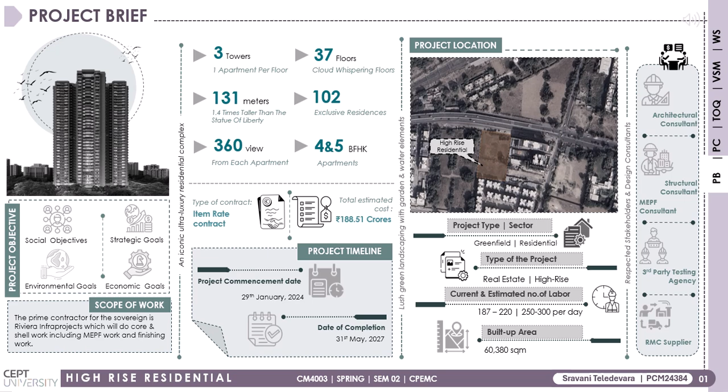Coming to the pre-construction activities, we have the pre-construction meeting, safety control measures, execution sequence, site mobilization plan, staff requirement, equipment and tools approval, legal, time, and cost. Coming to the site mobilization sequence, we have the mobilization planning, next the site survey and preparation, setting up the office and the labor colony, then setting up the material storage area, and then the equipment mobilization.

For the pre-construction meeting, we have stakeholders like architects, site engineers, contractors, subcontractors, and clients. In the pre-construction activities, we plan for the requirement of water and electricity on site and the labor colony. The main water sources are the borewell and the water storage tank. The basic machinery for electricity consumption was mainly the tower crane, bar bending machine, bar cutting machine, bar threading machine, borewell motor, and others from the non-tower areas.

Apart from this, the staff on site are the project manager, HR, quality department, that is the quality head and the engineer, the planning and billing department and the store department. We have around 220 laborers. Next under pre-construction activities, we have the legal approvals, that is, the responsibilities of the client and contractor.

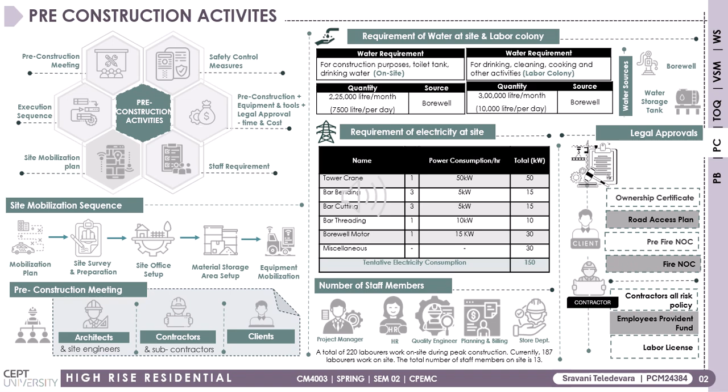Further continuation of the pre-construction activities mainly focuses on the safety control measures and equipment mobilization on site. Proper safety protocols are essential, especially for high-rise construction. Toolbox talks, PPE kits, soft and hard barricades, and safety boards were mandatory measures implemented on site. It also lists the major equipment like tower cranes and bar bending machines necessary for vertical construction. This reinforces that pre-construction safety planning is not just a compliance task but a foundation for effective execution throughout the project lifecycle.

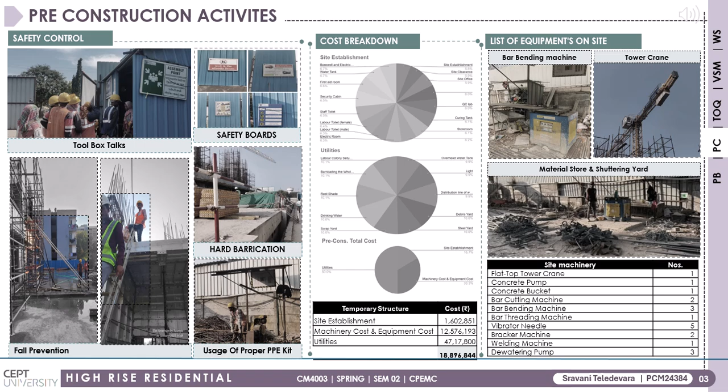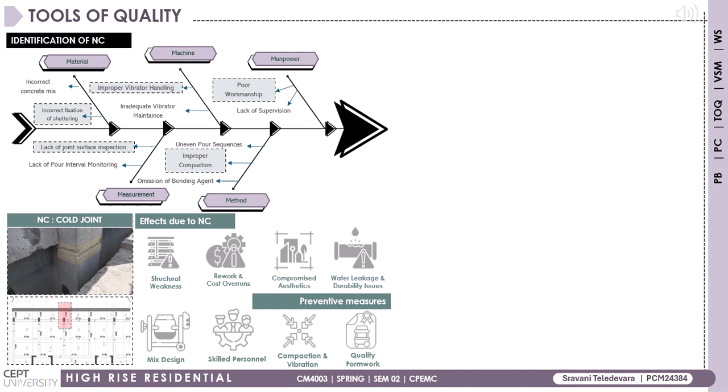Here we shift attention towards identifying and mitigating non-conformances during construction. Using histograms and Ishikawa fishbone diagrams, we explored the root causes of quality lapses, ranging from poor mix design and compaction techniques to lack of skilled labor.

The consequences of NCs such as water leakage, compromised aesthetics and cost overruns make early detection critical. Preventive measures like better formwork practices, skilled supervision, and standardized vibration techniques were suggested to ensure consistency.

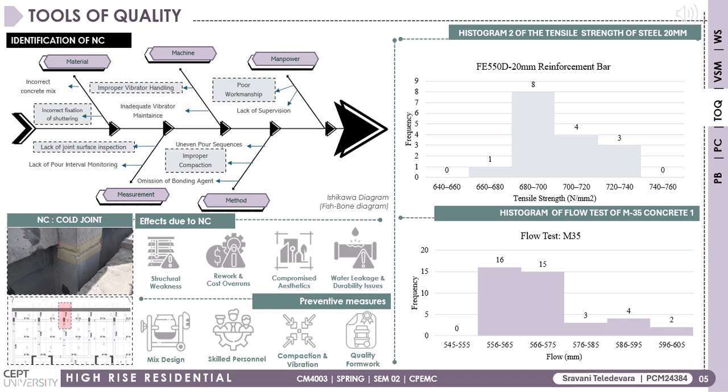Coming to value stream mapping, it is one of the most insightful tools applied for lean construction. Here, the current state of shuttering work for the shear walls was analyzed with a cycle time of 10.89 minutes per square meter, while the calculated target time was 6.75 minutes. It was clear that inefficiencies existed, so we mitigated the non-value Muda 1 and Muda 2.

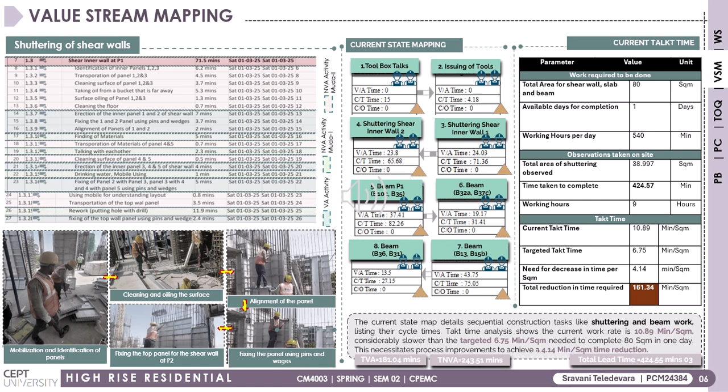The current state map also revealed a total lead time of 424.55 minutes, out of which only 181 minutes added real value. This mapping made it easier to pinpoint delays and understand where lean strategies could make the most impact.

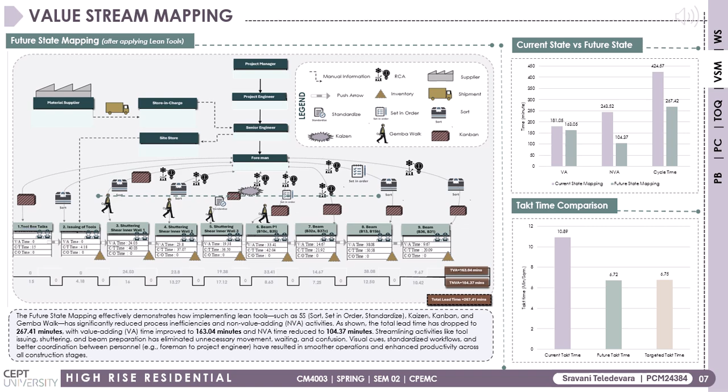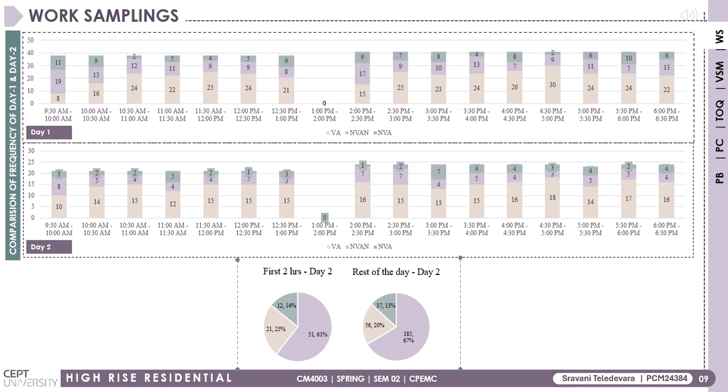Continuing the work sampling analysis, comparing time distribution on day 1 and day 2, interestingly, day 2 saw better concentration on core activities, with 67% of time spent on a single task compared to 59% on day 1. The drop in secondary task time suggests improved planning and flow.

Such comparative analysis not only helps understand daily performance trends but also aids in short term scheduling and micro level workforce management.

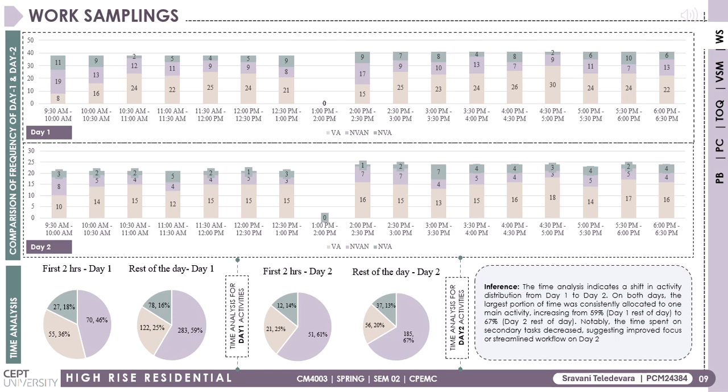Coming to my key learnings, the portfolio highlights the importance of integrating lean tools and quality management practices in high-rise residential projects, from pre-construction activities, mobilization and quality checks to lean mapping and work sampling. Each layer of analysis helped reveal insights into efficiency, coordination, and control.

Personally, the studio helped me develop a systems thinking approach to construction management. I learned that every delay, every rework, and every miscommunication on site is not just a task level error but a systematic inefficiency that can be addressed through structured tools.

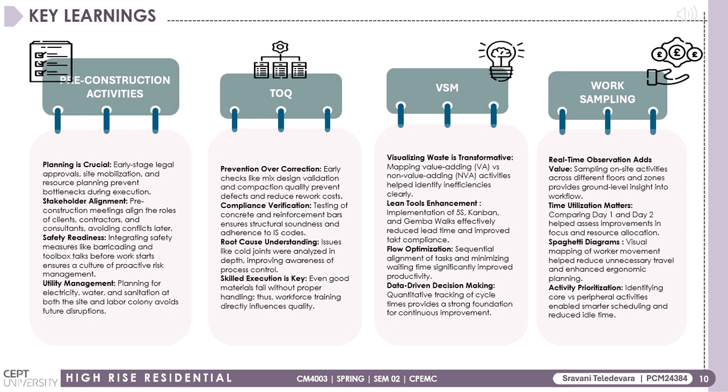I look forward to applying these learnings in real world projects, making construction not just faster and safer but smarter and more value driven. Thank you.